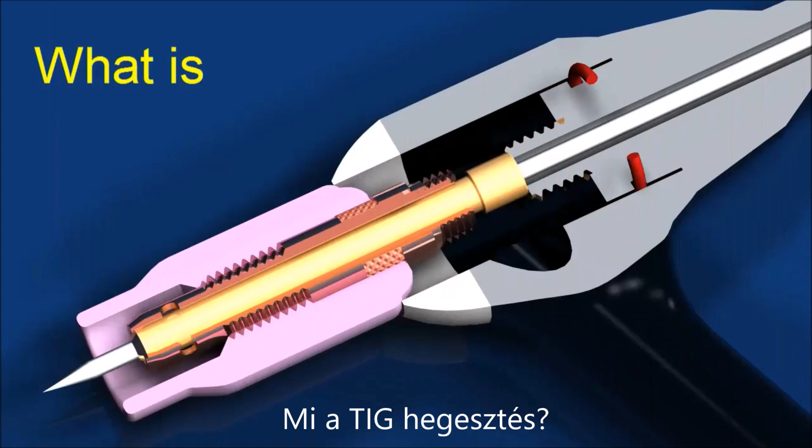TIG stands for Tungsten Inert Gas Welding. The American Welding Society calls this process gas tungsten arc welding, or GTAW. You might also hear it called heliarc welding.

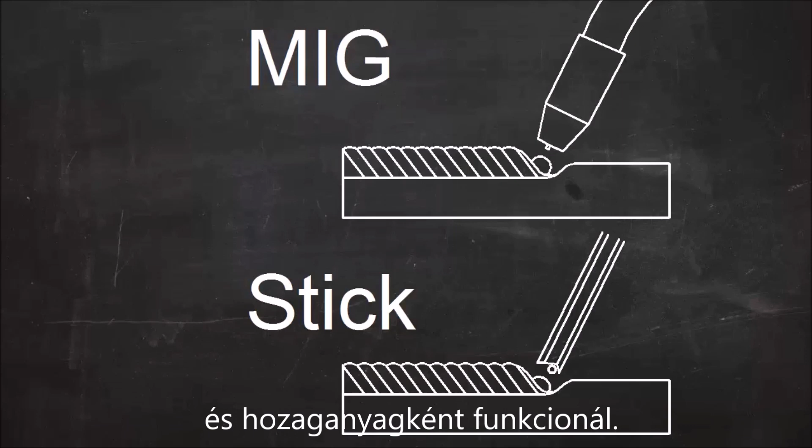TIG welding uses a tungsten electrode, and tungsten has an extremely high melting point. When you TIG weld, the electrode gets hot, but it doesn't melt. We say that it's a non-consumable electrode. That doesn't mean it lasts forever, it just means that it doesn't melt and become part of the weld. In a lot of other welding processes, the electrode melts and becomes filler metal. Those are consumable electrode processes.

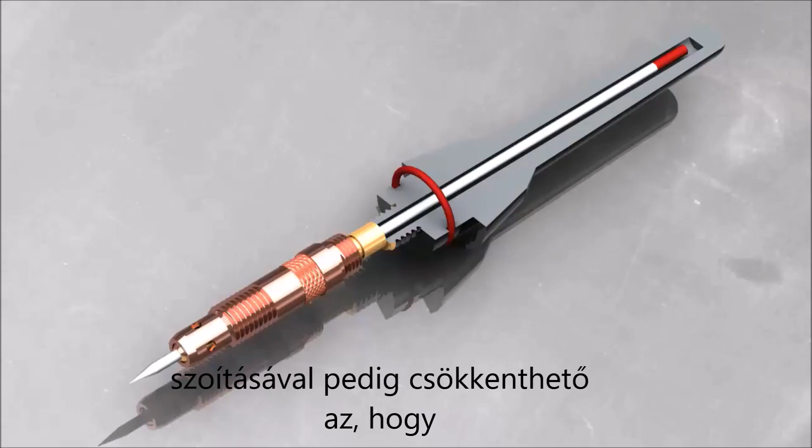Here's the tungsten electrode being held in a TIG torch. The electrode slips into a collet, and the collet tightens up against the collet body. You can adjust the length that the electrode sticks out of the holder by loosening up the end cap. When you tighten the end cap, the collet clamps down on the electrode.

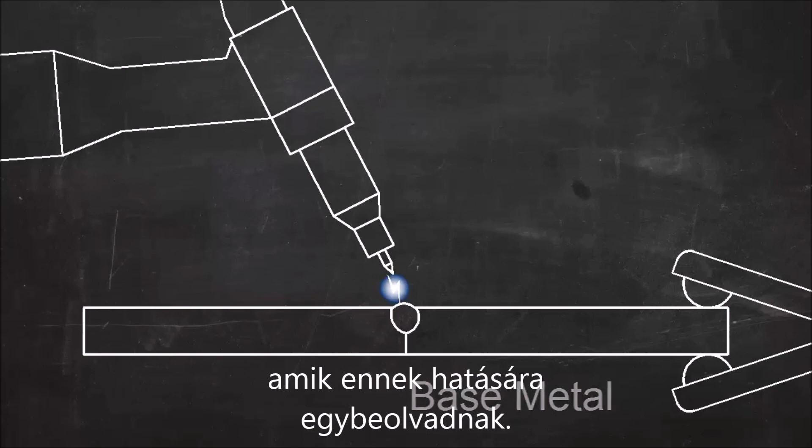TIG works by melting the base metal, which is the metal that makes up the two pieces that are to be joined. The heat is generated by an electric arc that forms between the base metal and the tungsten electrode. You can control the amount of heat with a foot pedal or with a thumb wheel on the torch.

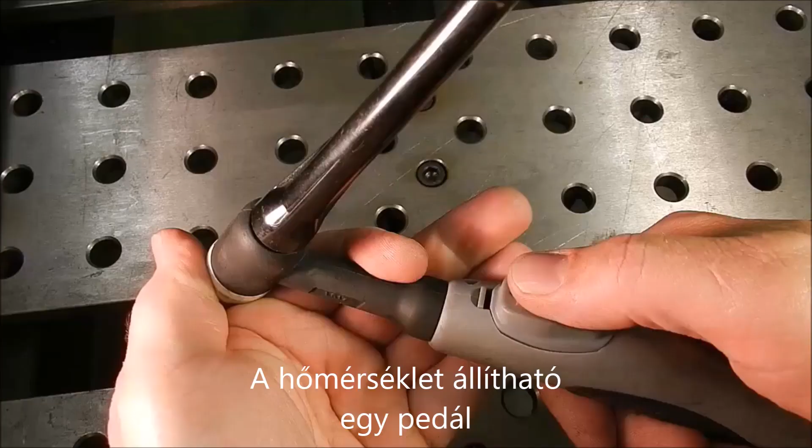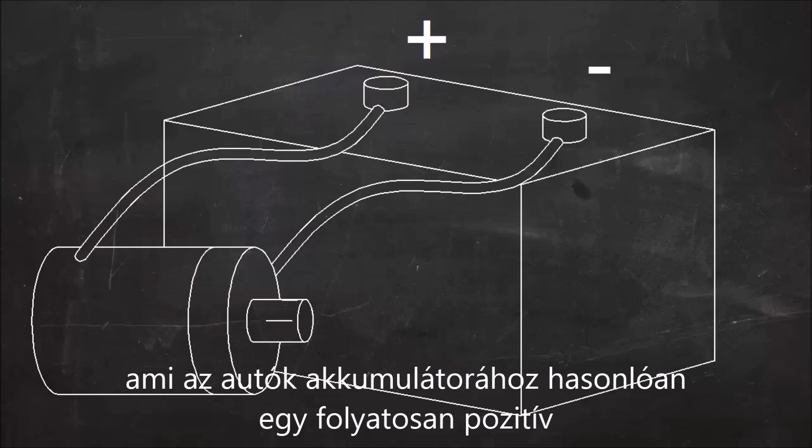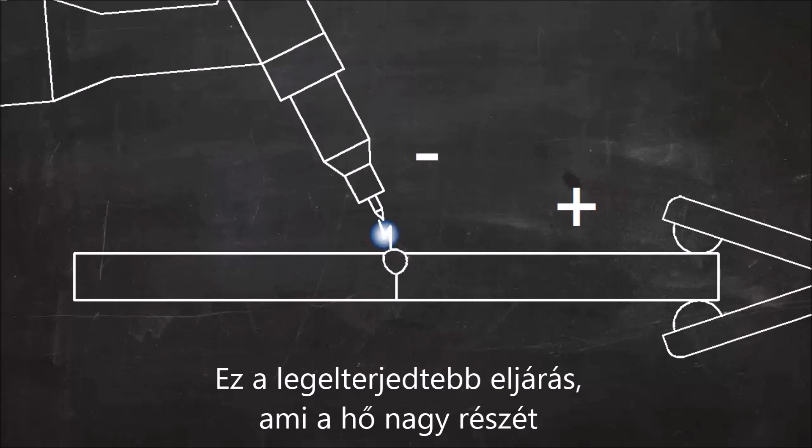For most metals, the current is direct current, or DC. DC is like the current flowing from a car battery. One wire is always negative and one is always positive. In DC TIG welding, the electrode is usually negative and the workpiece is positive. The term DCEN is used for this, indicating that the current is DC and the electrode is negative. This is also called straight polarity, but DCEN is a more descriptive term. DCEN puts most of the heat on the workpiece, and it's the most common setup.

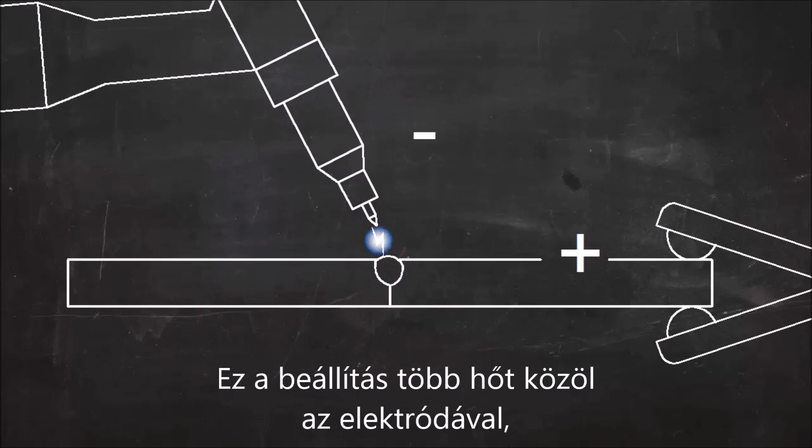When welding aluminum, however, AC is used. In AC, the positive and negative voltages switch back and forth between the electrode and the workpiece. This puts more heat on the electrode, but it has a cleaning effect on the workpiece. Aluminum forms oxides that float to the top of the weld pool and prevent a good weld. AC current helps control these oxides.

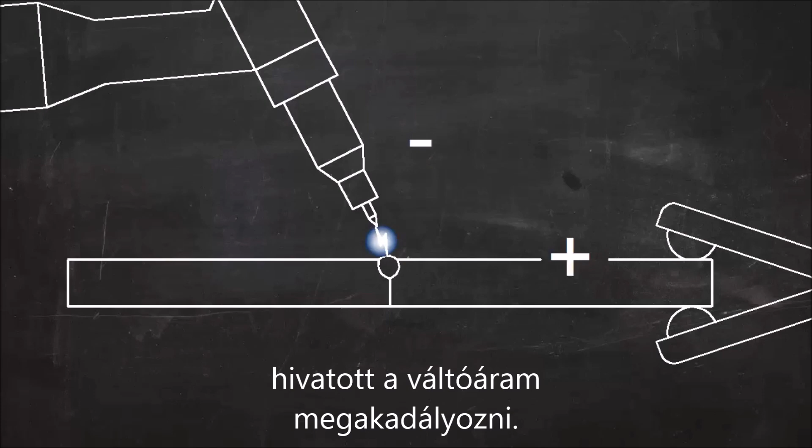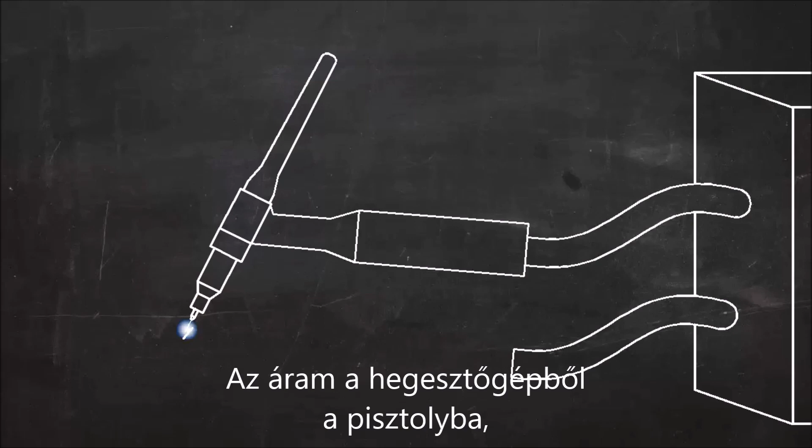In an electric circuit, the current flows in a loop. In TIG welding, the current has to flow in a complete circle from the machine to the torch, into the work, and back to the machine. A work lead is clamped to the work to complete the circuit from the workpiece back to the machine.

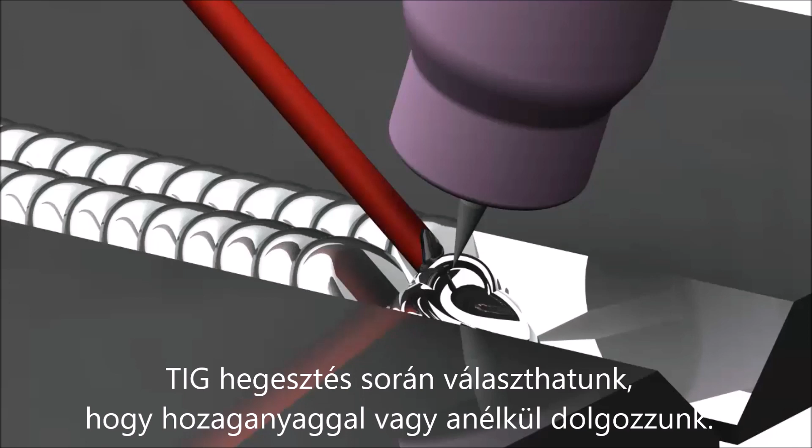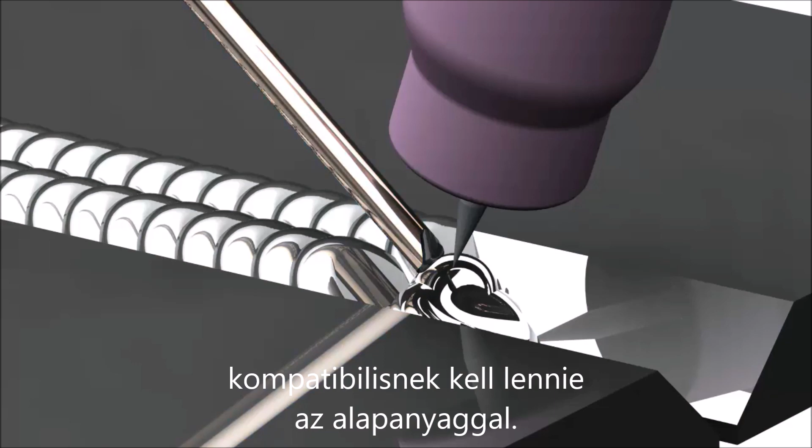You can TIG weld with or without filler metal, and that's not a choice you have in a lot of other processes. If you want to add filler metal to a TIG weld, use a filler rod, which is just a rod of metal with a specific alloy. You want to make sure that the filler metal you're using is compatible with the base metal and that it has the strength required to do the job.

So in summary, TIG welding is an electric arc welding process, uses a non-consumable tungsten electrode, the filler metal is added separately in the form of filler rod, and the shielding gas comes from a high-pressure cylinder.